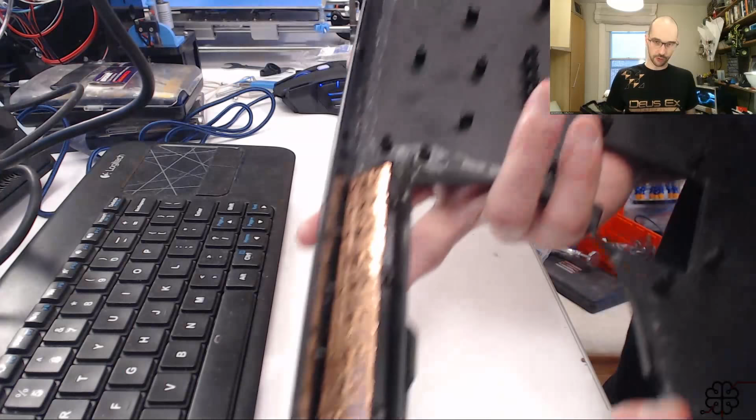So last stream we made some good progress, and we got both brackets on this side and that side of the keyboard fitting quite nicely inside, with the switches nice and centered. But the thing is, if I push on the switches on the underside, you can see it kind of just pops out easily, which is not great.

So we need to find a way to make this stick in there and not pop out. There's a few ways I was thinking of doing this. Now let me just pull up the focus controls for this camera.

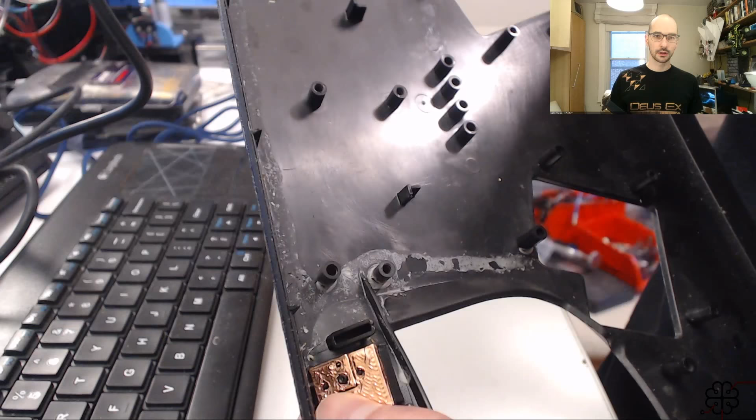All right, so if you look here - oh, the lighting's terrible. Oh, that's not too bad actually. All right, there we go. If we look here, let me move the soldering iron out of the way.

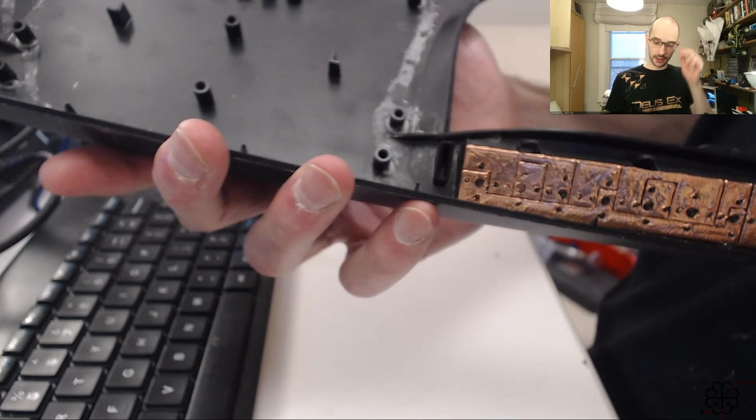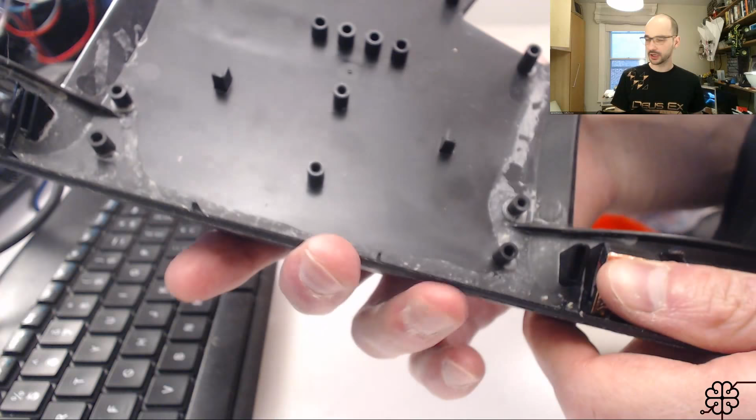All right, here there is actually a place for a screw that is not used at all in the original keyboard design. The motherboard mounts here, and I think the key wells on either side actually mount in this screw hole - this one is not used at all. I don't even think it's tapped, to tell you the truth. I think it's meant to be used by self-tapping screws. And there's one on either side, it's symmetrical, which is good for us.

There's also this little thingy here, this sort of rectangular thing, I don't know what that is exactly or what it was meant for. You know what, I don't even think the original PCB stretched that far. Let me pull one out.

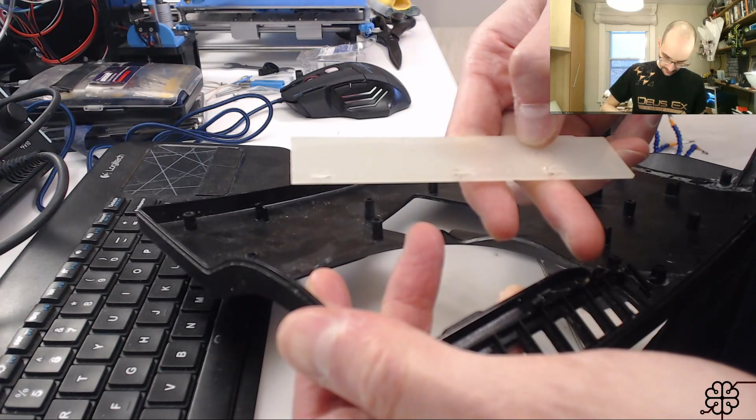So this is one of the original backing plates for the PCB. I can't even tell which side is which, and honestly, I think it's like this. There we go. Okay, so it was used kind of as a support, I guess - to make sure this thing didn't pop out, to make sure the end didn't bend, maybe.

I'm not sure. Anyways, we could extend our little box here past to this thing. We could even maybe print like a little square section tube, if you will, to kind of wrap around this. But my main goal is to get to this screw post here, so that we can screw the whole PCB in there.

My friend Tony actually suggested a clever name, I thought, for the PCB technique that I'm working on right now. He suggested to call it CT PCB, for copper tape PCB, which I think made sense. So I'm going to adopt that from now on. Thank you, Tony, for that suggestion.

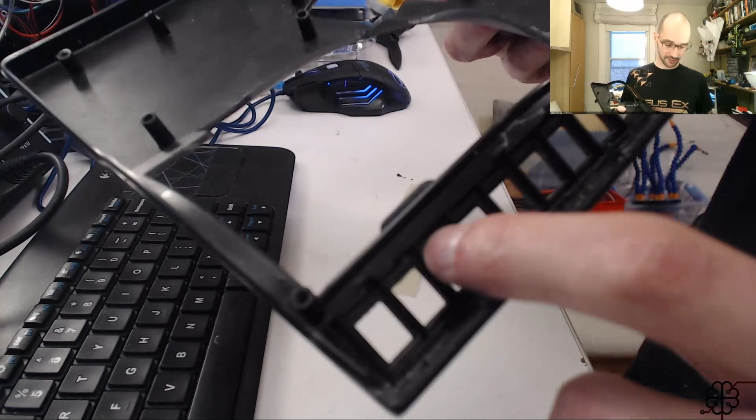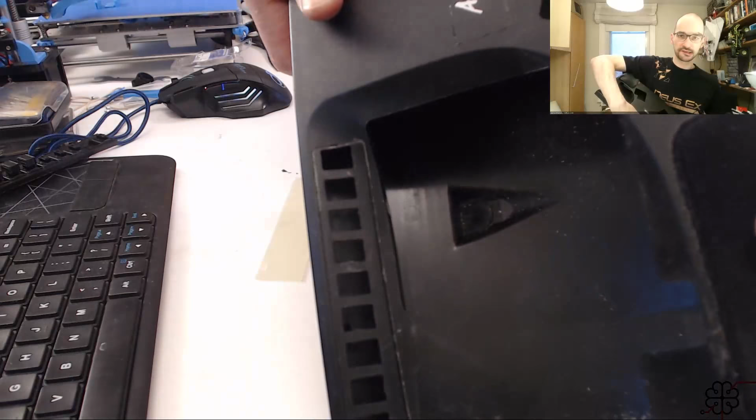So if I put the shell together, we can actually see the space that's in there. I can print my stuff, I can see how it feels. I can actually see through the massive hole in the key well whether it actually rests up against the key well properly or not, which is great. It turns out it's really gonna help us.

So without further ado, I'm probably gonna just flip right over to Fusion 360, take some measurements and stuff, and start modeling the stuff right away.

I wanted to mention that last week I was printing some parts for my printer, and I was really unlucky. I had a bit of a failure overnight, and it was kind of worrying actually. When I got up in the morning, all the cables were melted. There were short circuits. It's pretty much a miracle that I didn't fry anything or worse.

I've got a smoke detector right above the printer and an extinguisher right underneath, so I would have been prepared had there been an emergency. But still, I was really surprised that nothing burnt out. I was able to cut out some of the burnt wiring, splice it, make some new cables, and everything worked fine.

The driver still worked, the extruder motor still works, but I wonder if I can show a picture or two here. Let me quickly find a picture. It was... not awesome.

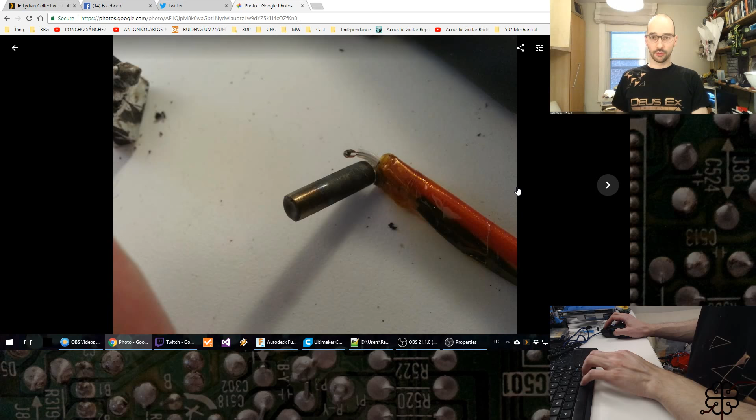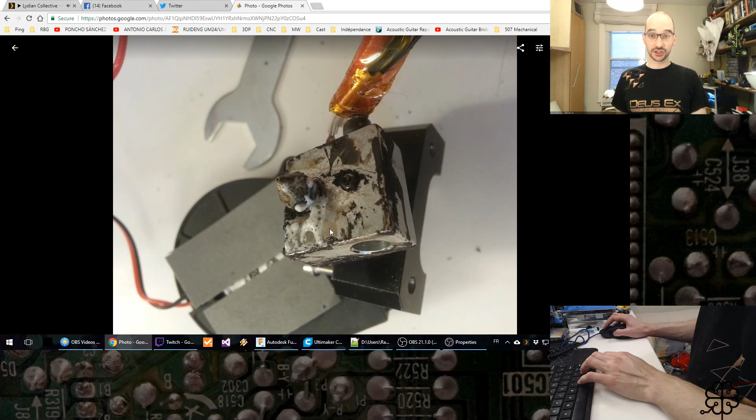So check this out. The heater was pulled out halfway, which is really bad news because the heater can touch stuff and ignite it. It's really quite warm. This was melted cable insulation all over my heating block. Really quite terrible - this heating block was shiny before the failure.

You can see the thermistor has actually been pulled out halfway, which is really bad because it means thermal runaway - the printer is going to just heat and heat until it basically never stops. Except I've got Marlin on there. When it detects thermal runaway, I think after a minute it cuts out the power to the hot end to avoid thermal runaway. This is the fan.

It got knocked out - it actually pulled some screws out. You can see there's a screw pulled out here. This is the cable that caught on the model I was printing, and you can see basically melted cables over here, maybe cables over here, more cables there.

Those are the servo wires - there were three that were shorted together. The fan wire there. Anyways, a pretty big mess. You can see some carbonized crap just all over the print bed. It's really no good, but the printer finished - it was homed and everything, so it was none the wiser.

Yeah, there you have it. All right, let me switch over to the desktop.

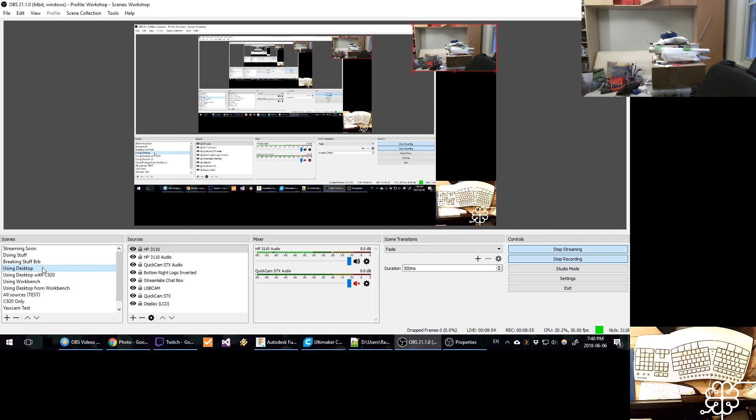Okay, we've got the Fusion. Sorry, I played around with swapping my primary and secondary monitors there.

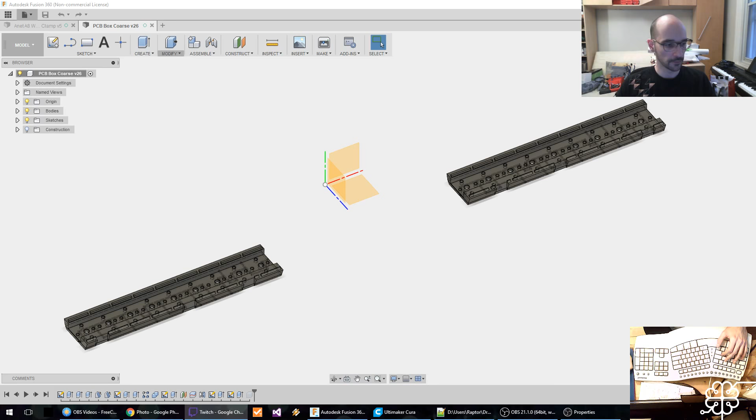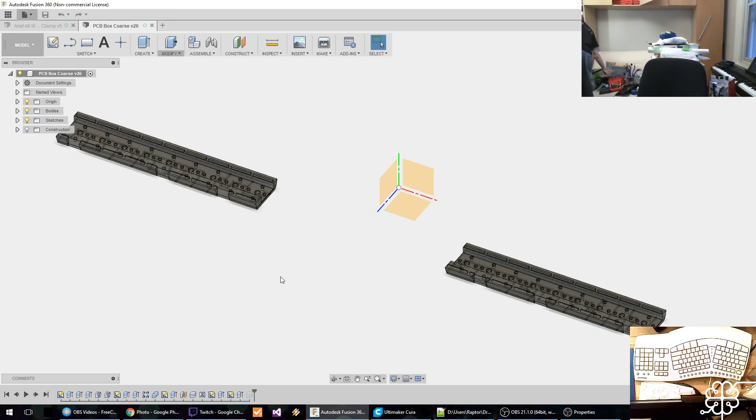All right, so we said - actually let me turn the printer off quickly. All right, take some measurements, take out the calipers.

So I'm going to quickly measure the edge of the switch well, I guess you could call it, to this kind of rectangular protrusion.

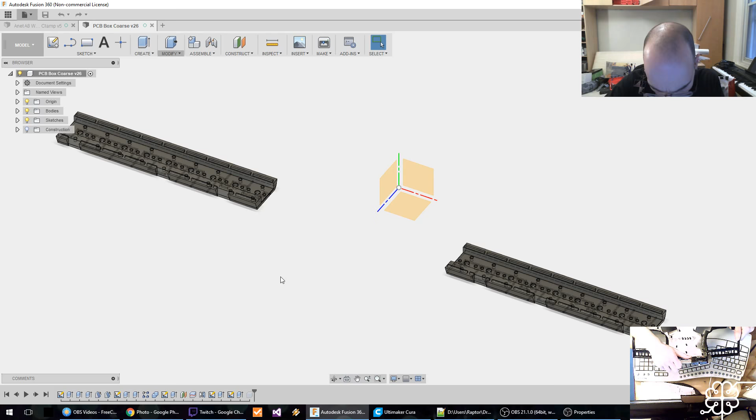I'm really going to have to guess at this one because my model doesn't actually line up - it doesn't end exactly where... sorry, let's say 4 millimeters, where the edge... I've got 2 edges that don't line up, one that's inside the keyboard. My model doesn't actually make it all the way to the edge, so I don't know what the delta in measurement is there. I guess I could measure that actually.

Where's the... there we go. So I'm just going to measure this. I'm going to put this back in there. And then I'm going to measure... yeah, all right. And it's really just eyeballing it there. I'm going to go and say that that's about 3.7 millimeters.

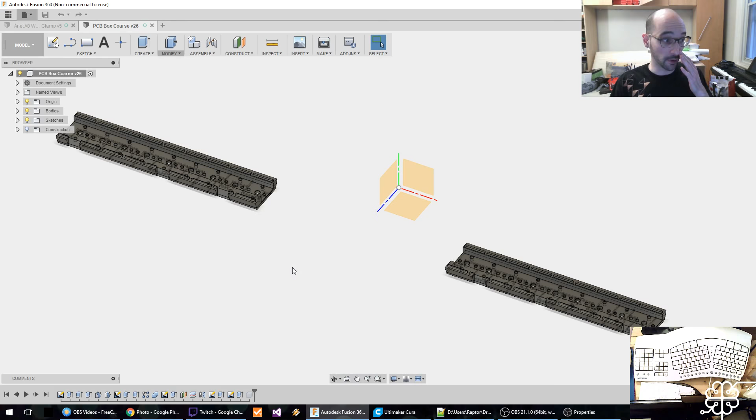And the beautiful part about this is we can do it once and it will do everything symmetrically. Is this the mirror? The pattern? No, this is the mirror. Okay, so if I go before the mirror...

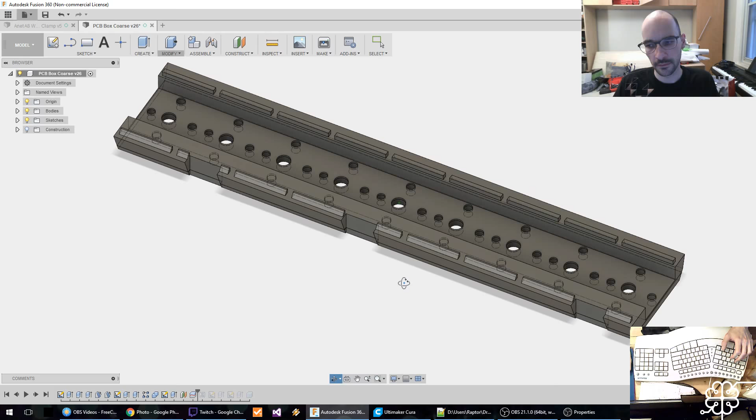That is suspicious to me. Was I really working on... oh yeah, I was working on that side first, that's right. Really? Yeah, okay, sorry - brain fart there. So that means that this side is the side that I need to extend.

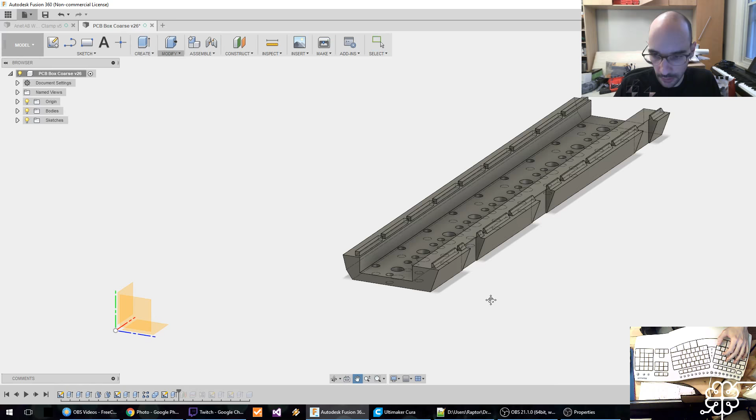And that is actually the first... you know, I'm actually going to do this pre-split, and then I think I'm going to extrude this face out by an extra - we said 3.7, right? Do I want to extrude the whole thing though? Not really, I kind of want to cap this off.

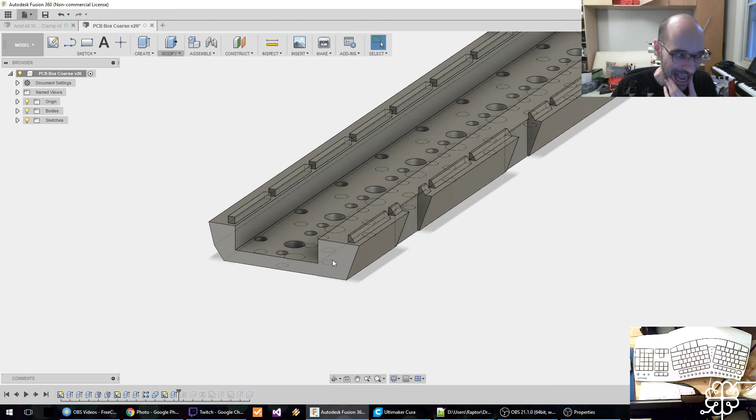Okay, I am going to extrude it a bit first by just a little bit, about 1 millimeter. All right, so I'm going to give it 1 millimeter, and then I'm going to cap that off.

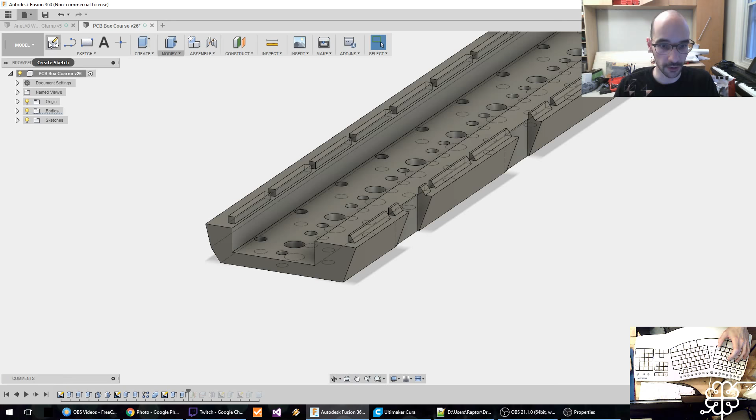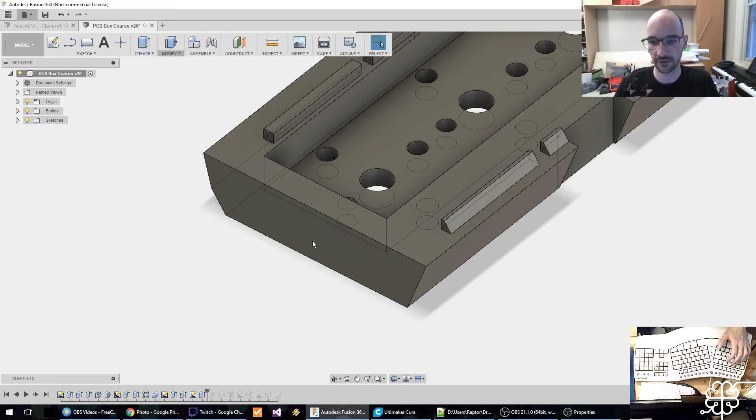So I'm going to create a sketch here in this plane. I'm going to project this, hide the body, then I'm going to draw here like that, stop the sketch. All right, extrude from here and here. And I said 3.7, so that's an extra 2.7 millimeters there.

Now that should line up nicely with the inside edge, or I guess outside edge of that little ridge I showed earlier. I know this is hard to follow without it on the camera, but you'll see as I model what I'm trying to do there. Now the outside edge would be what, an extra 8-ish. Let's call it 8 from the edge.

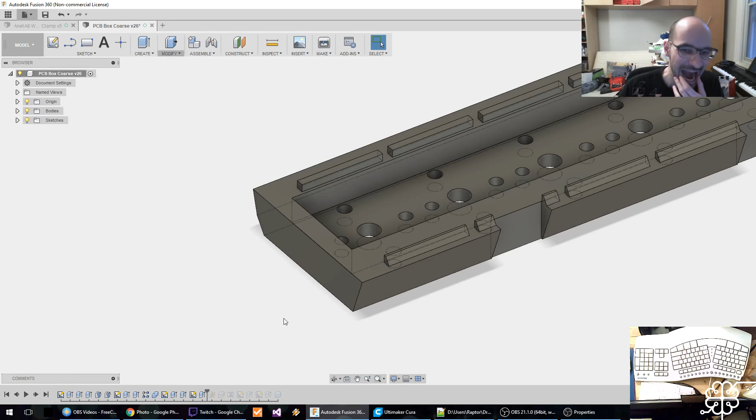So that was what? Wait. I want to say this is 5 millimeters wide. All right, .7, so that would be 7.7, and then...

Oh man, this is going to be quite a lot of iteration for this part, I think, because it's at so many different angles and stuff. Okay, so this is about 5 millimeters wide-ish, 4.5, well, 4.8, let's call it 4.8.

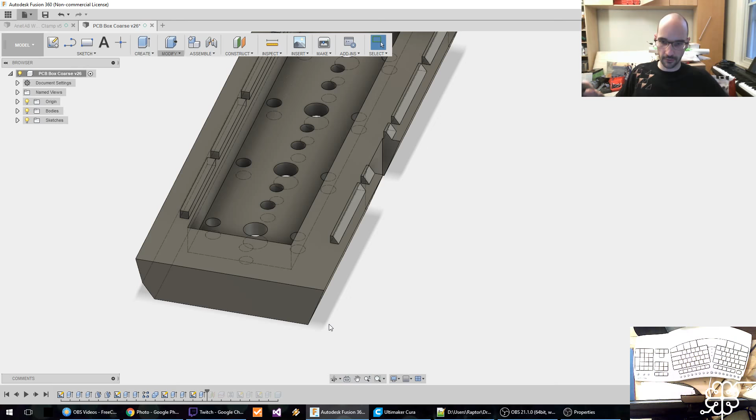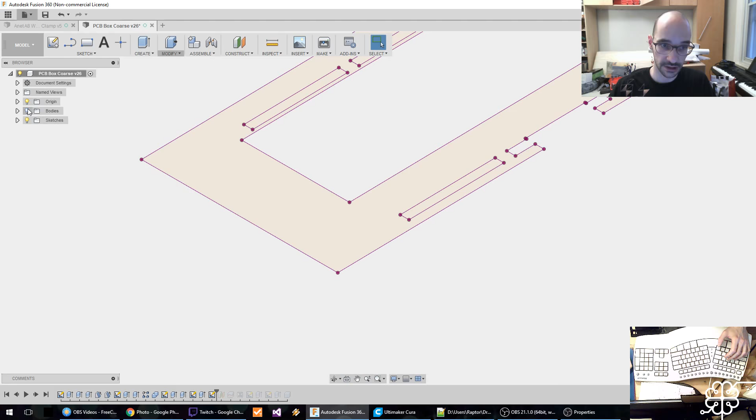Okay, so let's create a sketch here in this plane and project this guy. And then we said, oh, rather, I actually need to add an extra millimeter here.

Okay, so that's going to be a millimeter on the inside. All right. Okay. Like this. Millimeter on the inside. And we said 3.7 from this side. That's correct. Okay. That looks about right.

And oof. All right, so in this plane, this is very close to the edge. It's a good... Actually, if I model this, now that I think about it, I'm not sure this is a completely good idea, because if I want to use this, if I want to be able to slide it into the key bracket, this can't be very deep. I could have just a very light registration contour there. That would work.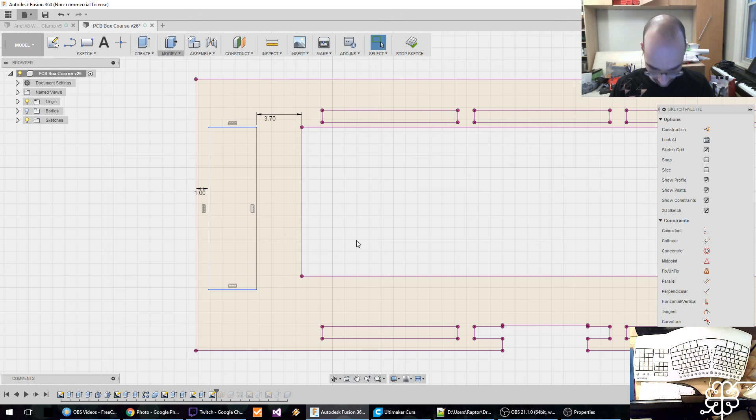All right. It's one of those things, right, where you design it once and then after that, every copy you print is forever better because of this. So it's worth taking the time.

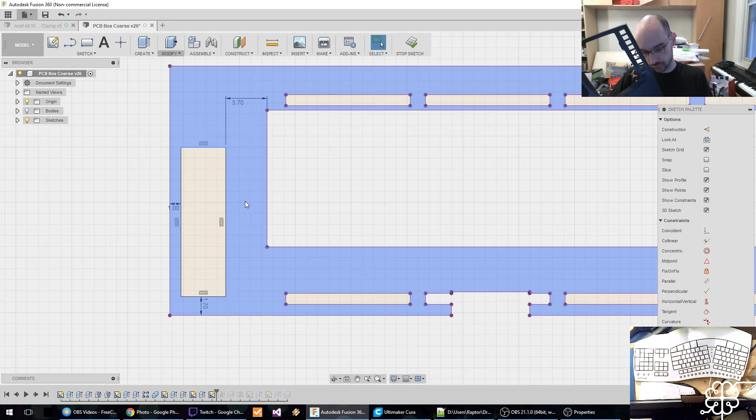Okay, this is the side with the gaps, which means that this side here is 1.7. And then on the other side, this doesn't... 13mm across. So it is not bad actually. It's eyeballing. Okay.

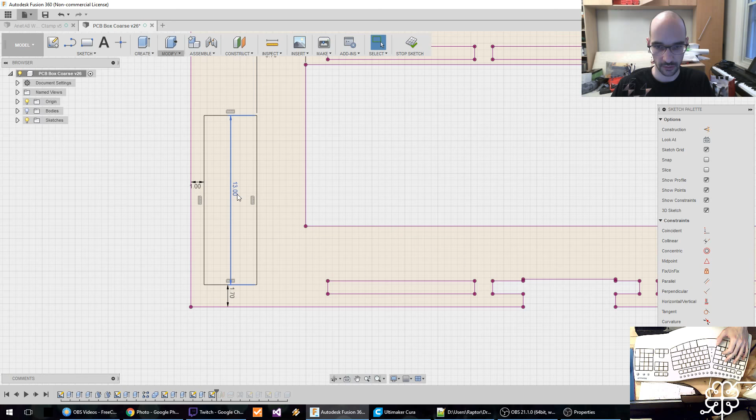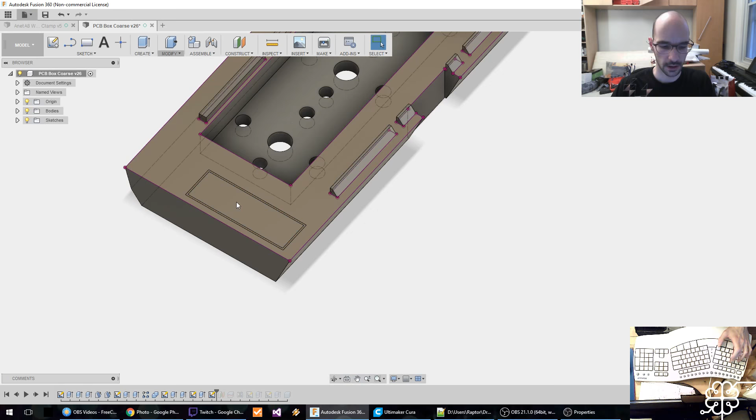But those are tight measures though, so I'm actually going to add a little bit to this. So, whatever, I'm going to offset this guy outside by -0.2. Yeah, okay. And then I'm going to extrude this outwards by 0.5 millimeter, something like that.

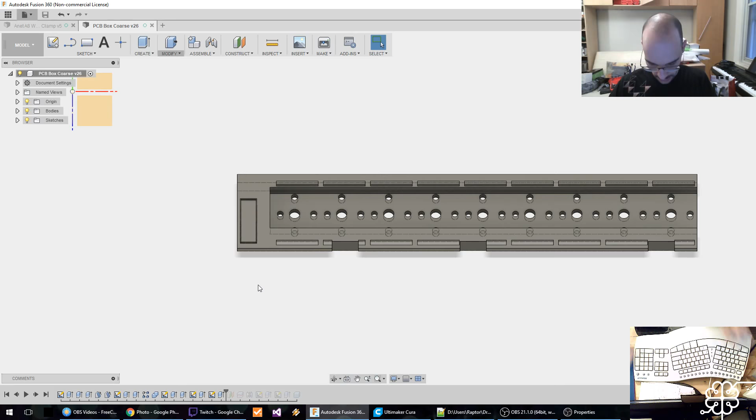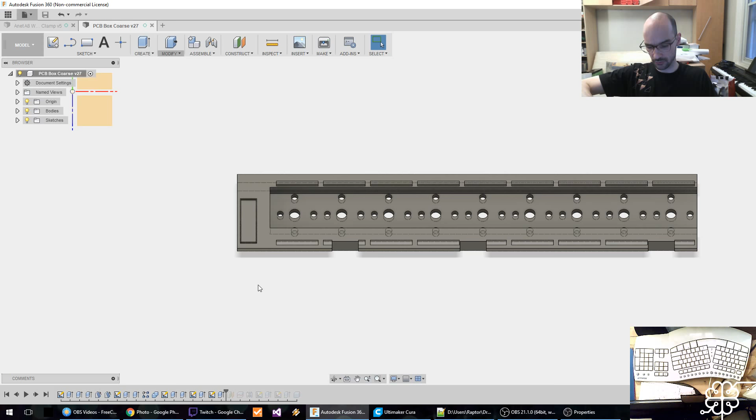Okay, that looks okay. And then let's try to reach the screw hole, which is at an odd angle, and whoa, this is going to be something. All right, so the screw hole is more or less 28 millimeters away. Yeah, let's call it 28.

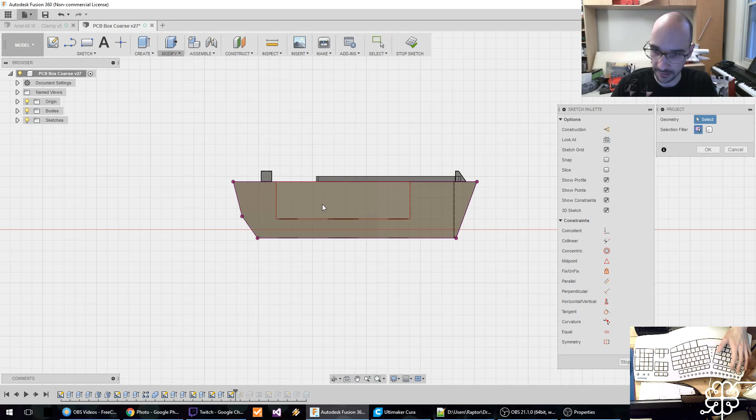So I don't think I want to extrude this whole thing though, this whole profile. So what I'll probably do is I'll create another sketch here. I'll project this end again, and I will make a horizontal thing parallel. Okay, and then make this say 2 millimeters thick. Stop that sketch.

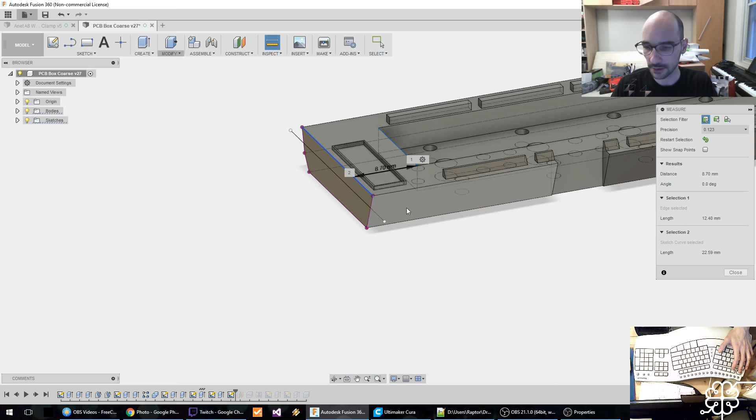And then just measure from here to here, 8.7. All right. Okay.

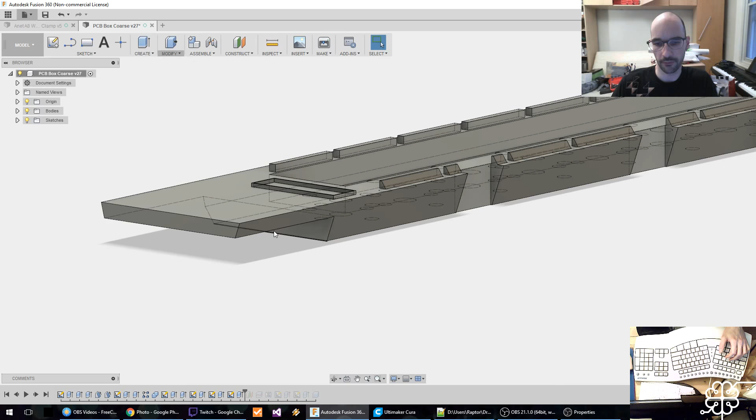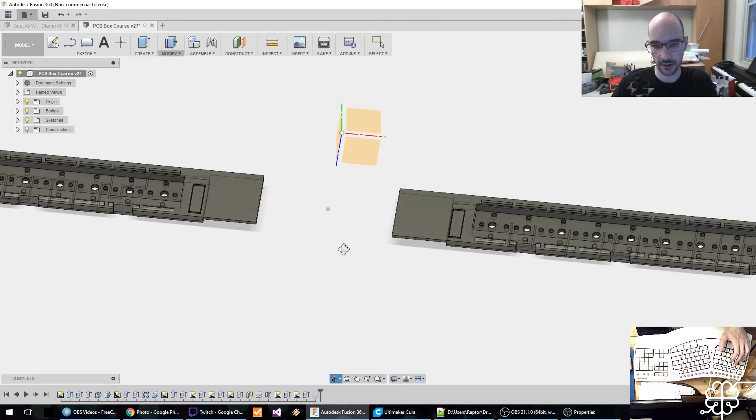Ah, wait. This won't quite print right because there's no support here for this. Though I don't really care about the finish for this part, so we could actually have this print with support. It would just be under this part. Yeah, that'd be okay, I guess. So let's just check. If we fast forward to the end, still works. All right, nice and symmetrical.

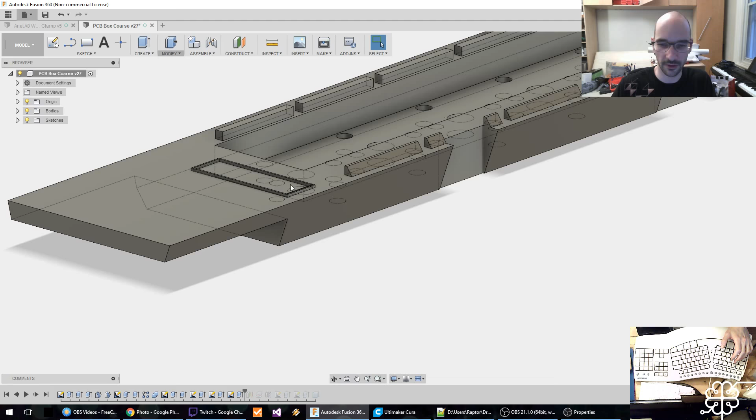You know what? I'm not actually sure about this being 0.5 millimeter. I think that's a little too much. Because it needs to fit properly, it needs to be like, to fit exactly, it would need to be drafted or something so that it would be on an incline, and that's more trouble than I want to go through.

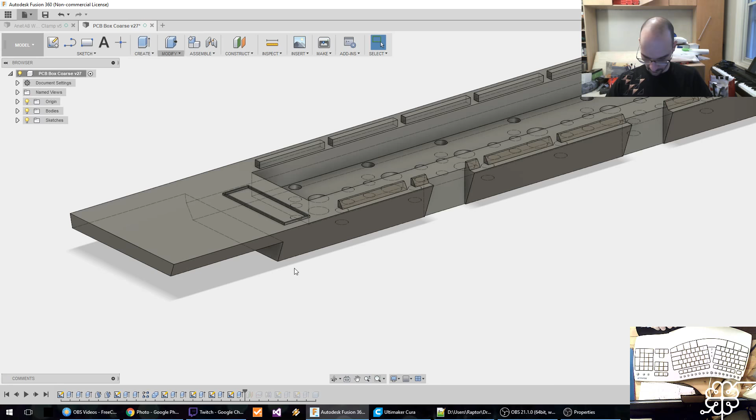Okay, so we said 28 millimeters to the center of the screw post. That would be something like 25 and a half. 25 and a half. Okay.

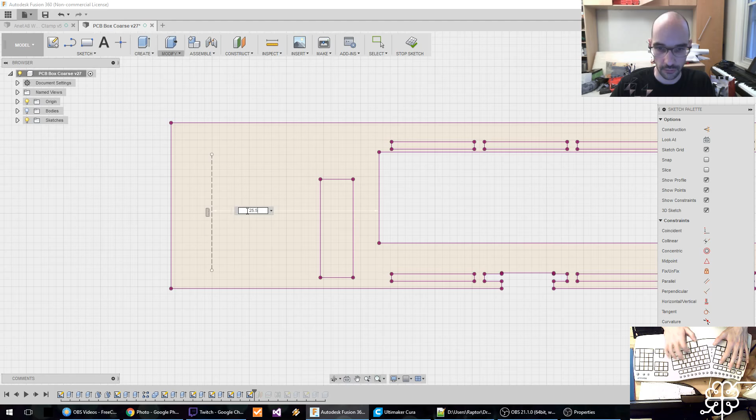So, ye olde project. Okay, so let's make this a construction line, and then, oops. 25 and a half. And then, there's an epic amount of eyeballing going on here. What kind of an incline is this? Wow.

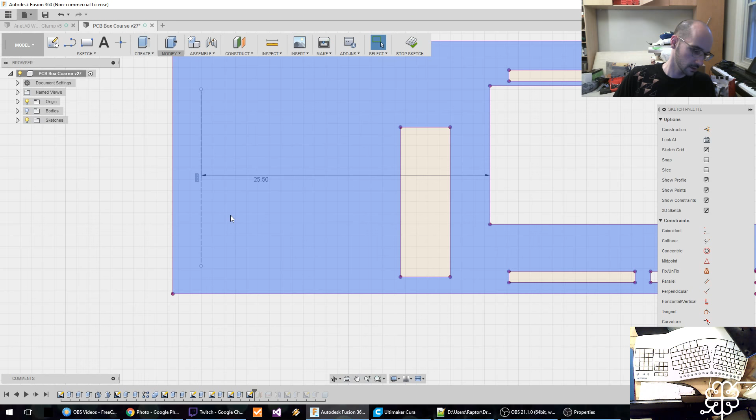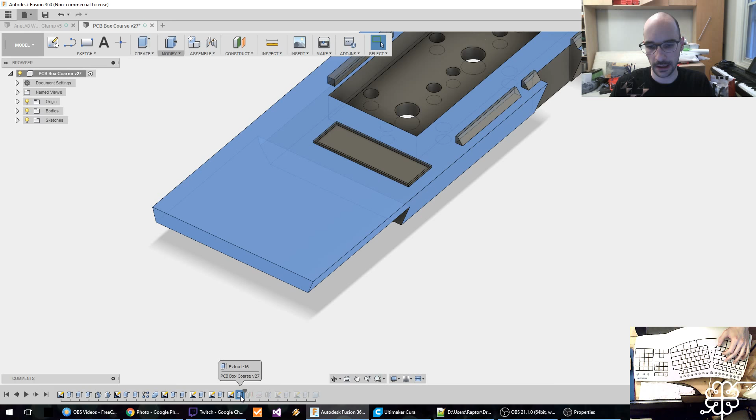Actually, no, this is not what I'm going to do. Thinking a little ahead here. Alright, it's time to try something crazy. I'm going to suppress this for now and show that sketch again.

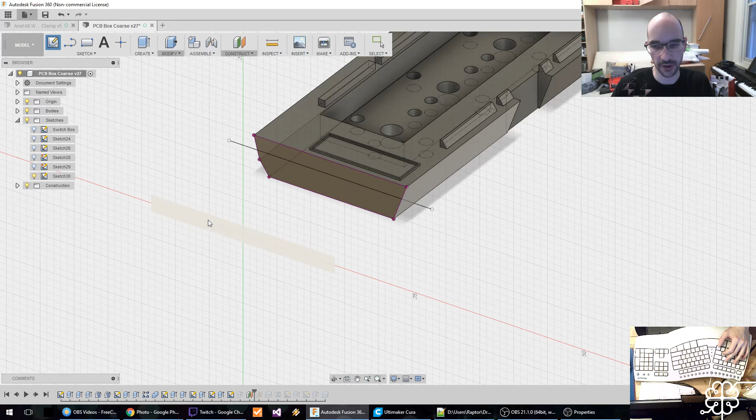I'm going to construct an offset plane from this guy, 19.3 construction. I'm going to create a sketch in this plane, and what I'm going to do is, okay, let's just think about this for a bit.

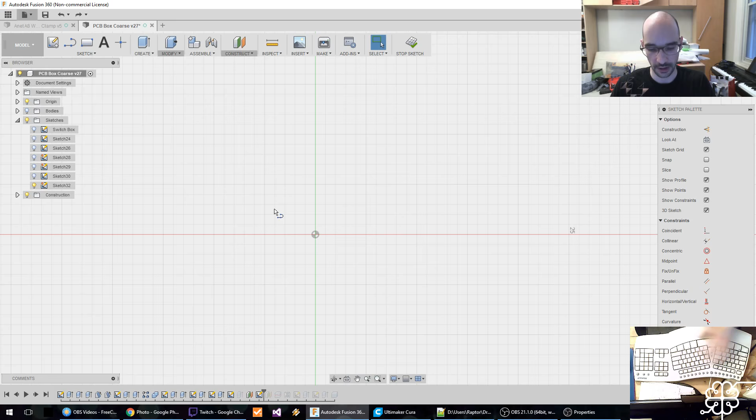So I'm going to draw a rectangle, which then, nope, I want this and that. Well, actually, let's undo that. Okay, so let's draw a little horizontal line and then draw a line like this, which we'll set at a given angle, which we don't care about for now.

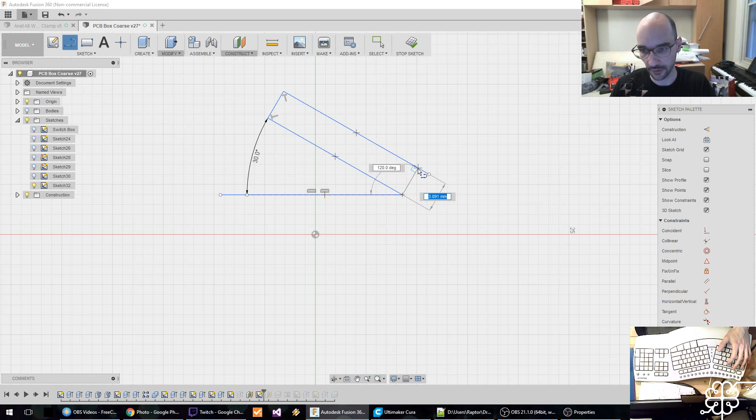This guy will make it perpendicular. This guy will make it, yeah, okay. And then this guy will be perpendicular as well. Perpendicular. Yeah, didn't like that, okay. So let's try modifying this constraint here. All right, this works.

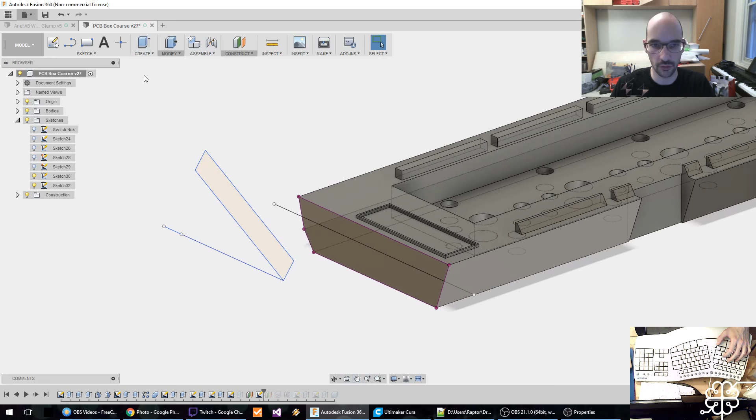Now, what I'm going to do is I'm going to loft from this profile to this profile.

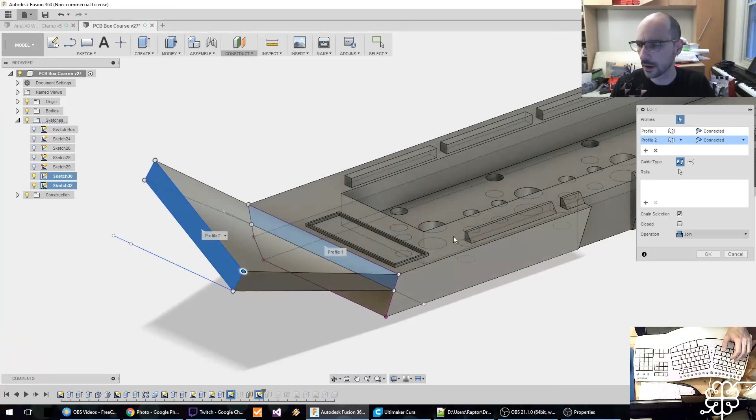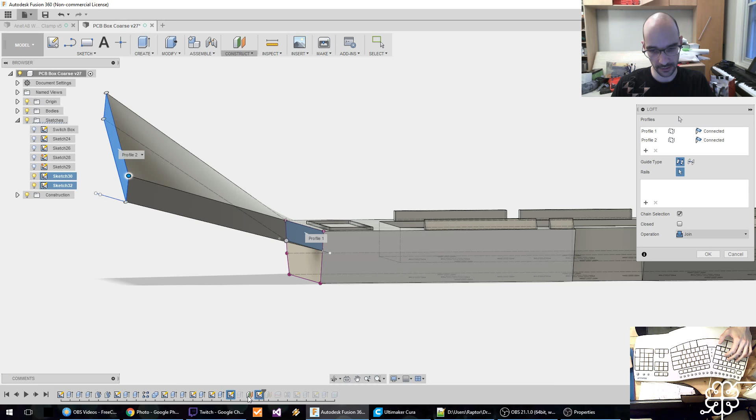Sure, that'll work. My only problem is that I don't actually want this to be so far out. I'm going to take this back a little. Instead of 19.3, let me knock, say, 6 millimeters off that.

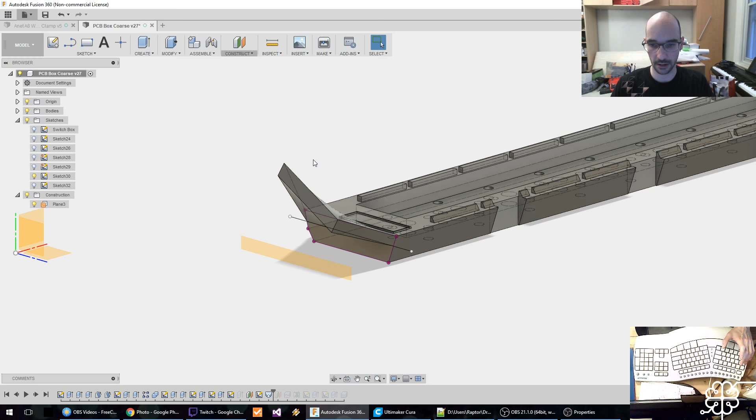So 13.3, and then I'm going to show this guy again, construct another offset plane here. Or rather, sorry, I actually don't need to do that. Yeah, okay, sorry, I can extrude this by 6 millimeters. There we go.

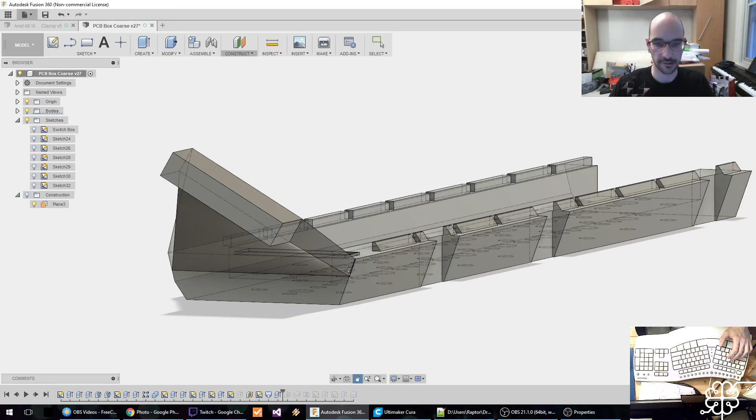Okay, it's starting to look a bit more interesting. Okay, so now I just have to get the right sizes. Alright, unfortunately, I think this is almost all I'm gonna have time to do, but I just wanted to try to tweak this curve so it looks a little more interesting.

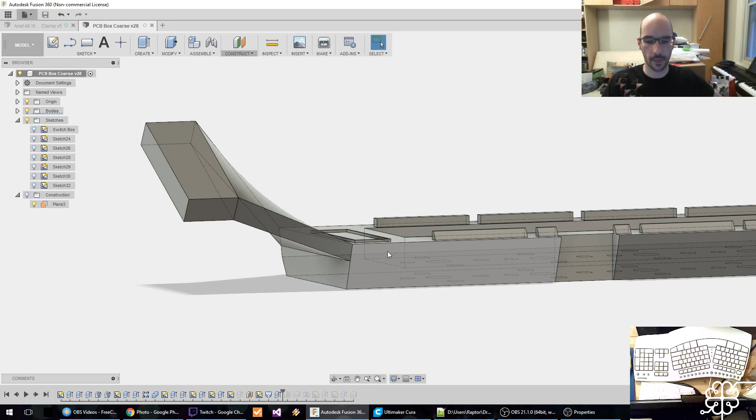It's going to be up. In this case, yes, up. No, yes, up and to the other side. So, in this case, I mean minus 30 degrees. What? Okay, there we go.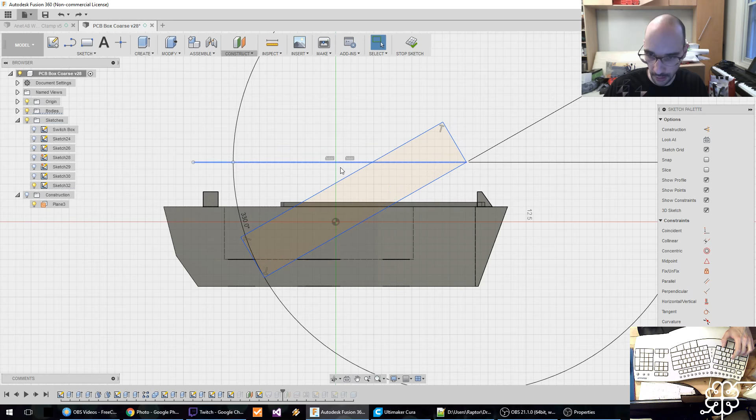And then I can move this guy around. Oh, I see what's going on here. Okay, let me constrain this a little more. And I don't actually need this to be that long. Let me make it, whoops. Was it 15 millimeters now? Whoa, why are you complaining about over constraining?

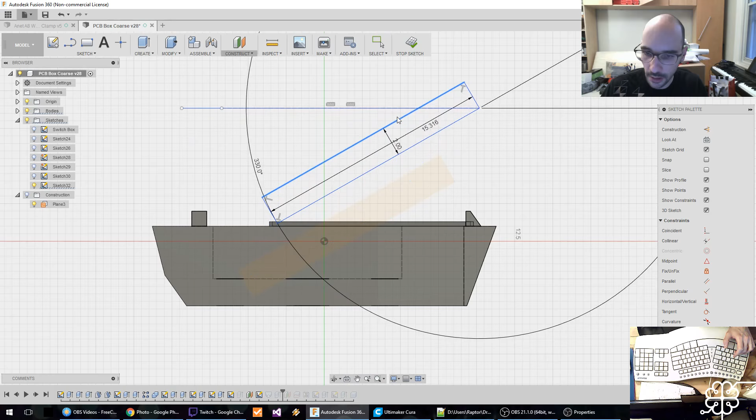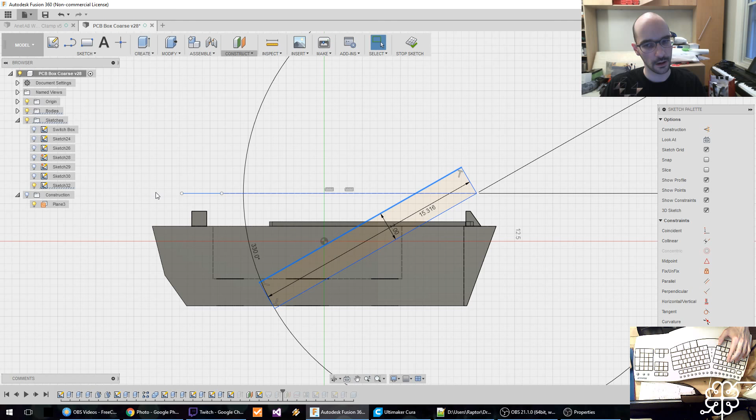I think I must have misclicked there. And now the idea is for the corner, yeah, that's kind of the wrong corner. Okay, let me quickly get rid of this line here. I want this corner to be horizontal, and I want this angle to be 30 degrees.

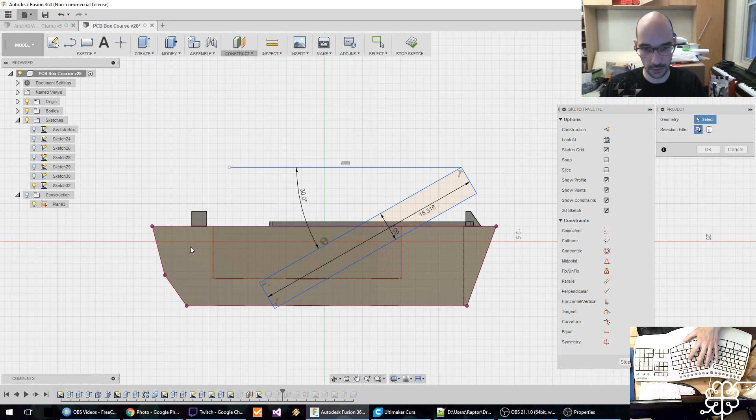There we go. Now if I hide the body, or good old project, and then constrain these to be, well, you know what, I can just get rid of this. Say this point needs to be on this line, coincident, and then give a dimension here. There we go. Now I can move this back and forth, and then the angle stays constant.

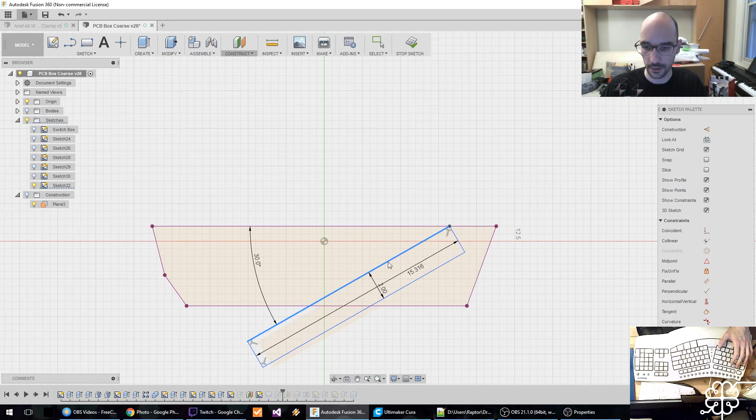So if I look at what this looks like now, looks a little better. All right, so I'm going to guess at where the hole is going to be, just so you can get an idea of, whoa, what happened there?

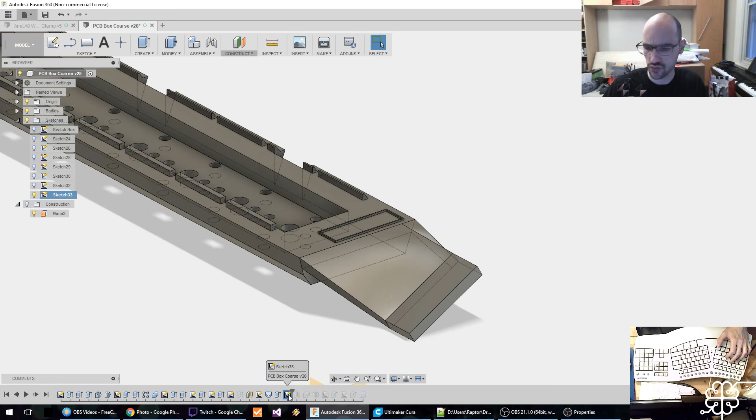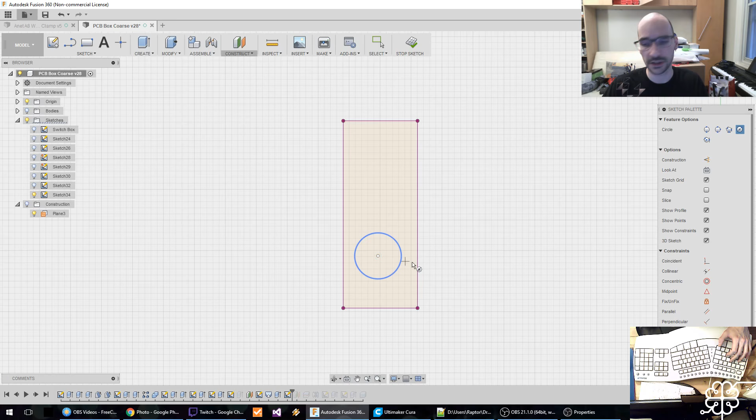Okay, and this face here, there's where, okay. And then, oops. And then make a circle. There'll be two circles, sort of one for the screw. Actually, I only really need one. I'm going to make it in the middle here.

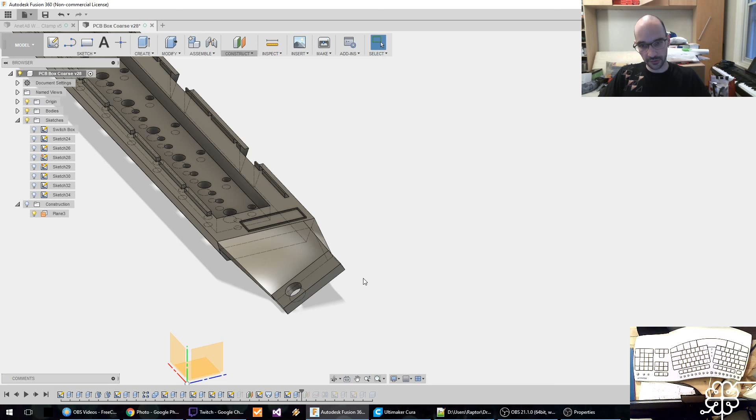And say that this has to be coincident. And then when I go like this, and pop this guy right through. There we go. So is that even on the right side? It is closer to the grooves. No, I'm going to, oh, sorry. Edit to sketch. Move this further like that. All right.

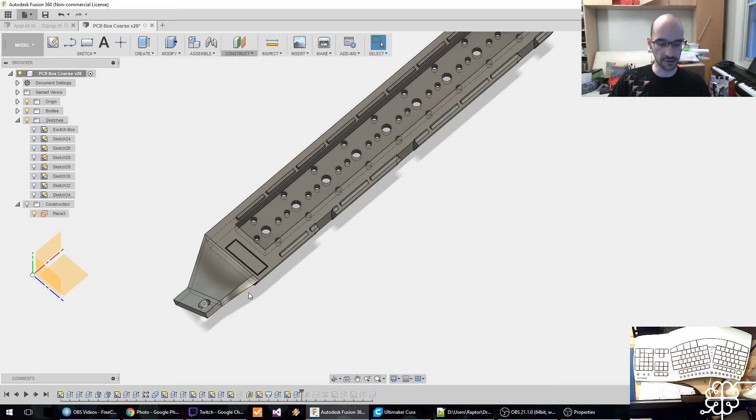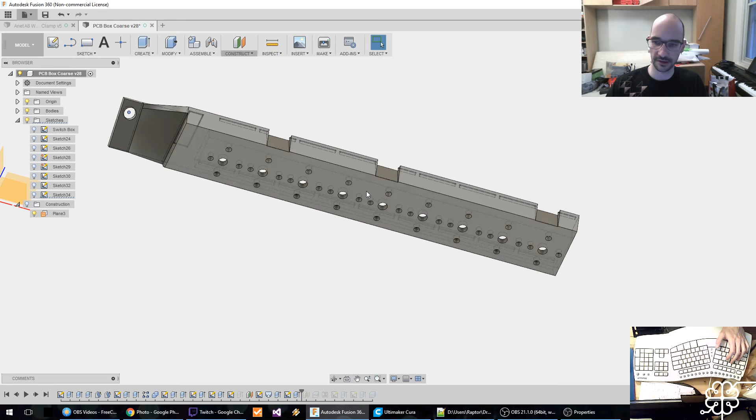So hopefully that gives you a good idea of my design process for this part here. I'm going to probably spend a bit more time just measuring some more and tweaking some distances and stuff. And I'm probably going to print, isolate just this part here, the last key bracket, and print that part a couple times and iterate on the exact dimensions. And then hopefully we'll wind up with a part that can be just screwed right into the keyboard. And once that is done, oh yeah, I've still got to put the sort of prongs on the back here to make sure that it sits properly against the back of the keyboard case.